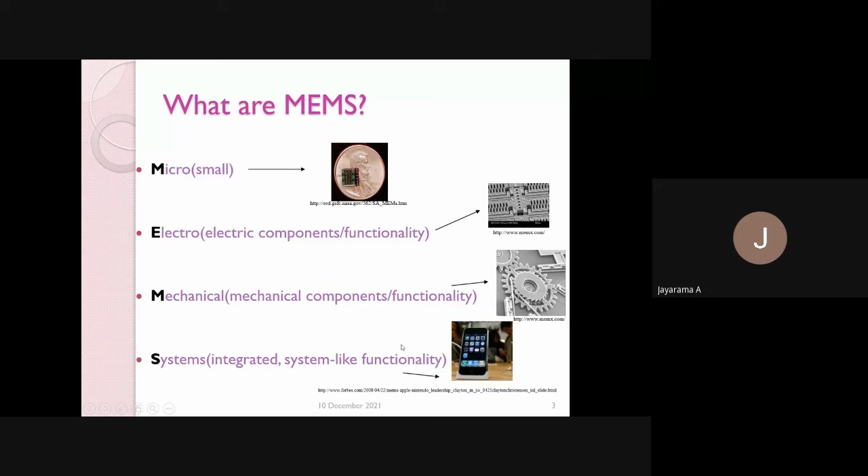So this is - micro means it is smaller in size. Electromechanical systems - system is an integrated system like a mobile phone. It's a system.

In brief, MEMS is a technique of combining electrical and mechanical components together on a chip to produce a system of miniature dimensions. It's the integration of millions of transistors on a single chip, which allows the microsystem to both sense and control the environment. The components are integrated on a single chip using microfabrication technique.

Where do you find MEMS? MEMS you can find in printers, high DPI inkjets. MEMS technology is used in the manufacture of inkjet print heads. This involves the formation of a tiny mechanical system on a substrate such as silicon or glass, which requires sophisticated micro-level microfabrication technology. For example, Konica Minolta has used this MEMS manufacturing technology for the high definition, high precision fabrication of nozzles and ink channels, which affect the characteristics of print head ejection.

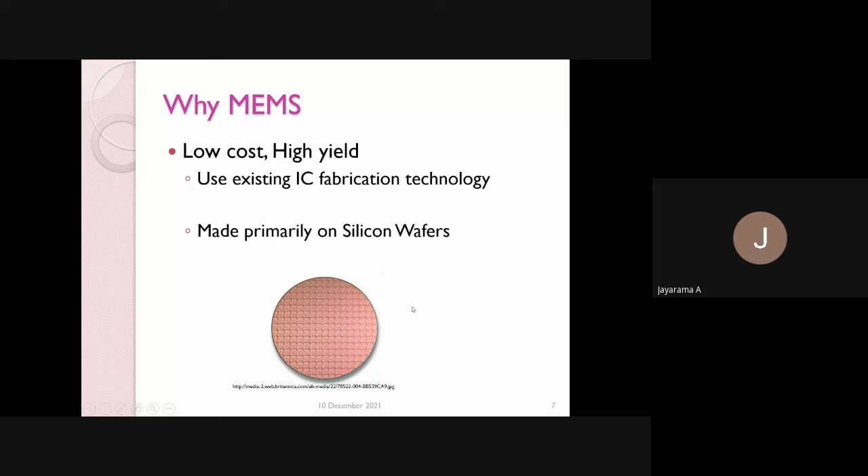MEMS flow sensors accurately detect minute airflow, as much as a single flap of a butterfly's wings. A gas flow sensor capable of measuring mass flow independent of temperature and pressure.

The well-known company which supplies this, you might be knowing, that is Omron. Omron BP measurement meters are well-known. MEMS air and gas flow sensors are highly resistant to dust, with a built-in dust segregation system. The sensor can be placed anywhere thanks to its dust resistant structure.

The favorable scaling for a lot of applications is another one, that is electrostatics. Electrostatics plays a prominent role in micro and nanomechanics, while other forces such as thermoelectric forces, piezoelectric forces, and even magnetic forces are used in micro and nanomechanical systems, that is MEMS and NEMS. Electrostatic forces are by far the most commonly employed.

Electrostatic forces are used to move mechanical components in electrostatic systems, and fluids in electrostatic fluidic systems.

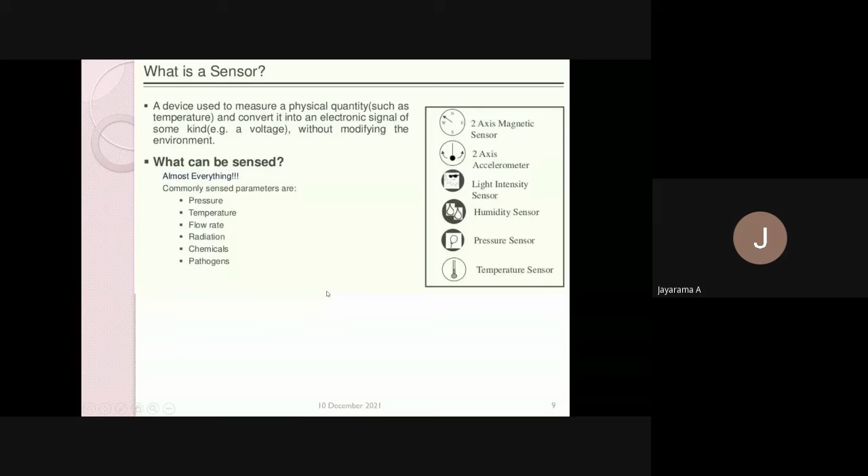MEMS have both advantages and disadvantages. The advantages: MEMS switches and actuators can attain very high frequencies. They are smaller in size. MEMS devices require very low power consumption.

MEMS can be readily integrated with microelectronics to achieve an embedded mechatronic system. It improved reproducibility, high accuracy, sensitivity, and selectivity, and is cheaper due to mass production. MEMS sensors possess extremely high sensitivity. Scaling effects at a microscopic level can be leveraged to achieve design and dynamic mechanisms otherwise not possible at macro scales. Also, it is easier to alter part of a device as compared to its macro counterparts.

Disadvantages also exist. One is that it is mainly expensive, very expensive during the research and R&D stage. Any new MEMS designs or devices cost a lot of money because in the R&D stage it requires more cost. Fabrication assembly unit costs can be very high in low quantities. Therefore, MEMS are not suitable for unique applications unless cost is not an issue.

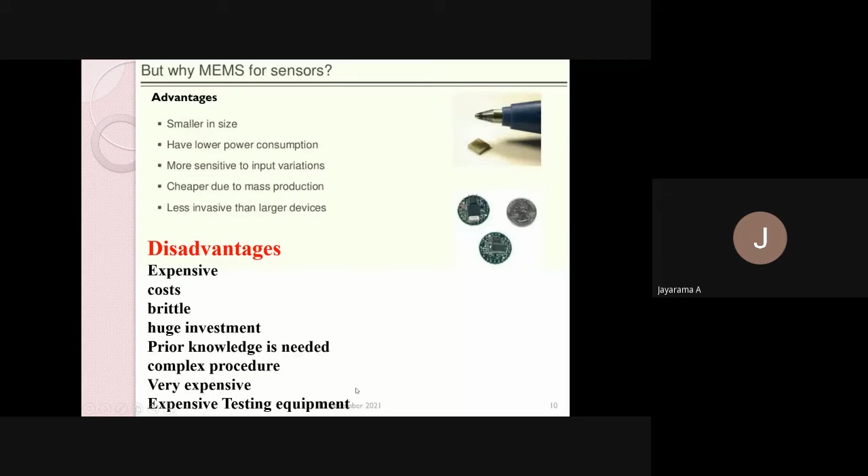Most of the MEMS devices are made of silicon. Polysilicon is a brittle material. Fab establishment requires huge investment. Prior knowledge is needed to integrate MEMS devices, and the design includes very complex procedures. There are also very expensive upfront setup costs for fabrication, clean rooms, and ancillary facilities, and the testing equipment to characterize the quality and performance can also be expensive.

These are all different types of sensors, mainly classified into four categories: mechanical sensors, optical sensors, thermal sensors, and chemical and biological sensors. In mechanical sensors, physical concepts or material properties are used, one being piezoresistivity and piezoelectricity. The types of mechanical sensors are strain gauges, accelerometers, pressure sensors, microphones, etc.

A strain gauge measures how structures, both man-made and biological, react to an applied strain. These devices are common in the mechanical and civil engineering fields for monitoring structural health of bridges, detecting soil pressure changes near oil drilling platforms, and testing aircraft components. Strain gauges can even be used to analyze bone structure in humans and animals.

In the fields of civil engineering and biomedical engineering, strain gauges are used to measure deformation sustained by various objects. Typically, foil gauges are used, but they have low sensitivity.

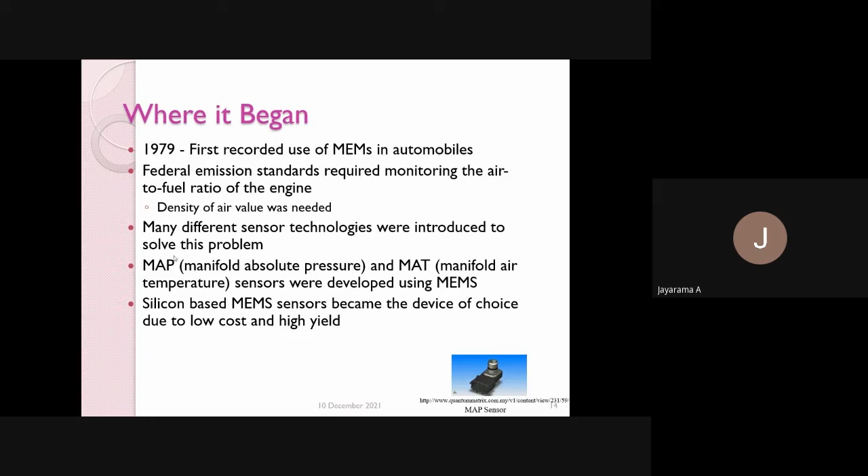By doing this, the catalytic converter efficiently minimizes tailpipe emissions, bringing them into compliance with federal regulations. Many different sensor technologies were introduced to solve this problem. MAP, manifold absolute pressure, and MAT, manifold air temperature sensors, were developed using MEMS. Silicon-based MEMS sensors became the device of choice due to low cost and high yield.

These are different types of current and future automotive sensors: oil quality sensors, coolant temperature sensor, vehicle speed sensor, steering rate sensor - a variety of sensors you can see. Also fuel level sensors and fuel tank pressure sensors. Some of these are in ordinary cars, while in expensive cars most of the sensors exist.

Who developed these? There are two groups. One is Delco Electronics Group, that is General Motors - they used piezoresistive sensing around the mid 70s. The other company is Ford, which developed two types of MAP sensors.

MAP means manifold absolute pressure. The Delco version had a sensor die similar to the Honeywell sensor die of the time, and was packaged in a housing similar to the Fairchild ignition module.

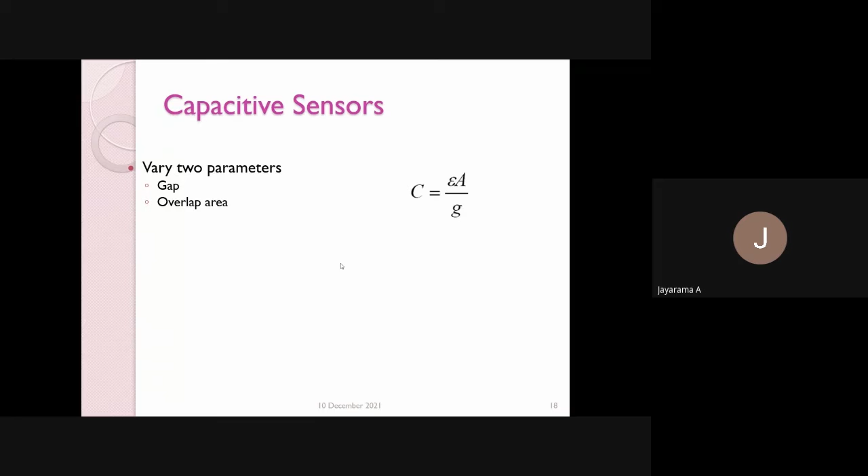In this parallel plate capacitor, A is area and G is the spacing, and epsilon is the permittivity of free space. It is a well-known value, in farads per meter: 8.854 times 10 to the power minus 12. These capacitive sensors act like a simple capacitor. A metal plate in the sensing face of the sensor is electrically connected to the internal oscillator circuit, and the target to be sensed acts as a second plate of the capacitor. So a parallel plate capacitor has two plates.

One plate is fixed, the other one is oscillating - that is the accelerometer, oscillating. So based on this, the capacitor sensor works.

The capacitive MEMS pressure sensors are one of the most widely used transducers of various MEMS pressure sensors, since they offer excellent noise performance and low power consumption. These are the advantages of a capacitive sensor - one is low power consumption.

It also has a disadvantage: the capacitance of a MEMS capacitor is usually very small, so stray capacitance and parasitic capacitance are relatively large. This is the main disadvantage - the effect of stray capacitance and parasitic capacitance, meaning unwanted capacitance, becomes relatively large. Therefore, special attention has to be paid to these effects in the design of sensing structure and circuitry.

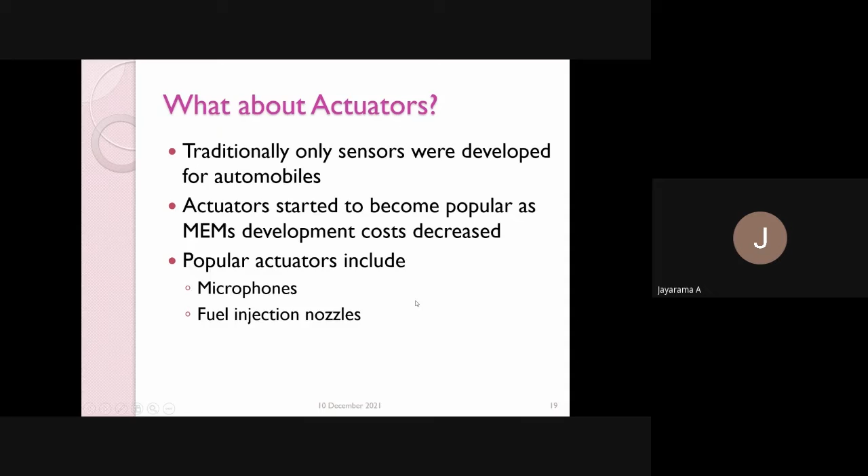This is about MEMS sensor fabrication - there are a few steps in the fabrication. These are important steps one must know. After undergoing MEMS FDP, one must know at least a few fabrication techniques.

The first step is wafer production. Usually silicon wafers are used in fabrication, so I'll brief about how we get a silicon wafer. The wafer is a round slice of semiconductor material such as silicon. Silicon is preferred due to its characteristics - it is more suitable for manufacturing ICs, integrated circuits, and it is the base or substrate for the entire chip.

First, purified polycrystalline silicon is created from sand. The sand is heated to produce a molten liquid - it has to be heated to a very high temperature because the melting point of sand is high. A small piece of solid silicon is dipped into the molten liquid, then slowly pulled from the melt. For the growth of silicon ingots, they use this melt technique, and the liquid cools to form a single crystal ingot.

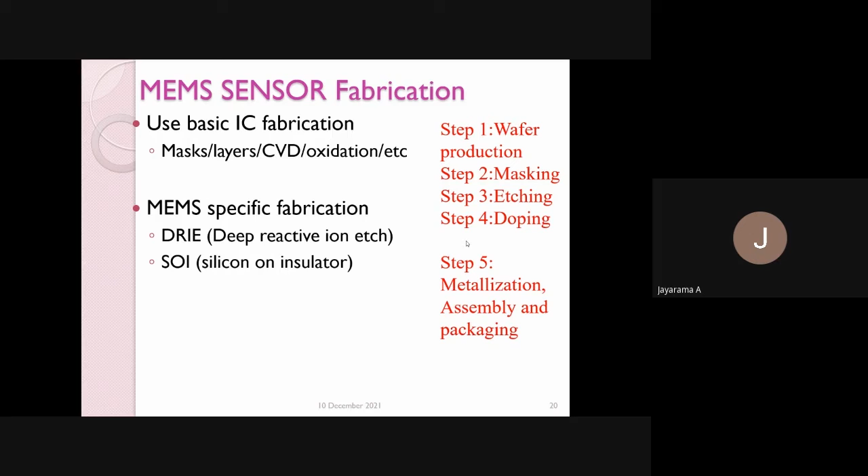There is a growth process called epitaxial growth, meaning the growing of a single silicon crystal upon the original silicon substrate. A uniform layer of silicon dioxide is formed on the surface - Si and SiO2 is a very good combination. Usually, when you slice silicon, SiO2 will automatically coat the surface for masking. This is one important step to protect some areas of the wafer while working on another area, a process called photolithography.

A photoresist film is applied on the wafer. The wafer is aligned to a mask using a photo aligner, the MJB mask aligner, a well-known aligner. Then it is exposed to ultraviolet light through the mask. One has to optimize the intensity, and before exposure, the wafer must be aligned with the mask. Generally, there are automatic tools for alignment purpose.

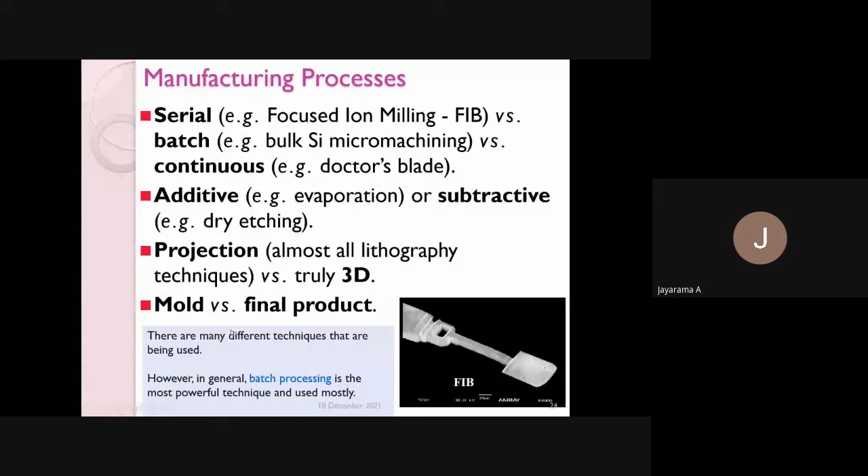In MEMS manufacturing technology, bulk micromachining has two categories: wet etching and dry etching. Surface micromachining involves deep micromachining and fusion bonding on the surface. The third manufacturing technique is high aspect ratio micromachining, LIGA.

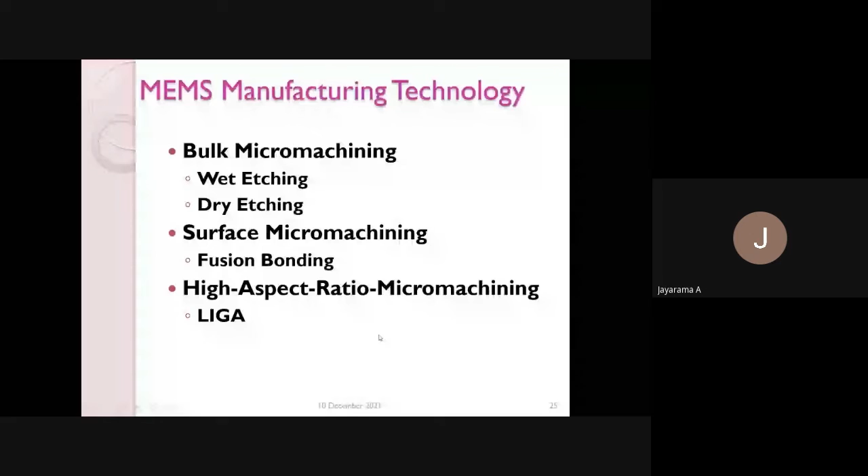LIGA is a German word. So in brief, bulk micromachining means this technique involves the selective removal of substrate material in order to realize miniaturized mechanical components.

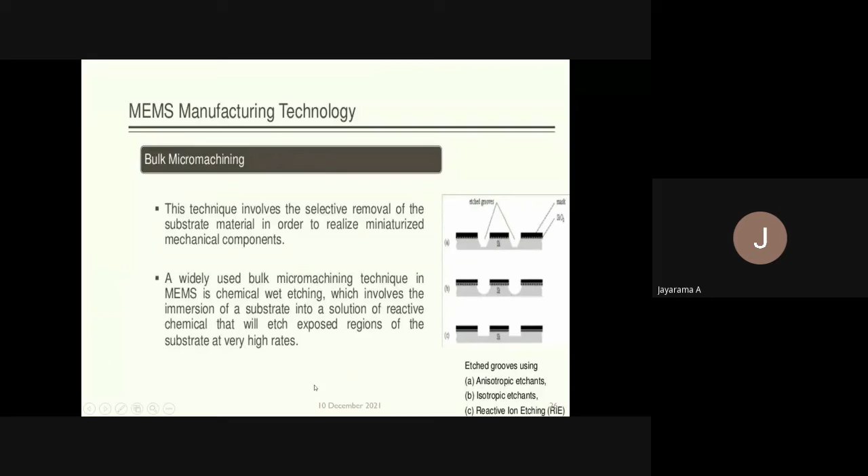A widely used bulk micromachining technique in MEMS is the chemical wet etching technique, which involves immersion of a substrate into a solution of a reactive chemical that will etch exposed regions of the substrate at very high rates.

Bulk micromachining means it is a process that produces structures inside the substrate by selective etching. Surface micromachining also has an etching process, but it creates structures on top of the substrate by film deposition and selective etching.

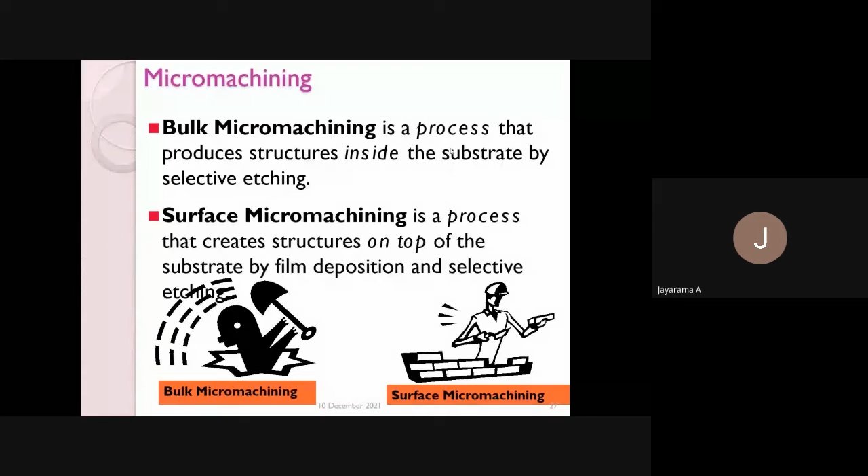I will show you the surface micromachining structures and bulk micromachining structures. I will spend some more time on the bulk micromachining fabrication technique. After that, we will explain our results, how we fabricated, and which steps we used for the fabrication of cantilevers—mainly beam cantilevers and cantilevers for the purpose of energy harvesting as well as for vibration sensors.

This is the classification of bulk silicon etching. Bulk micromachining is a process that produces structures inside the substrate by selective etching, using two techniques: wet etching and dry etching. In wet etching, isotropic etchants are different from anisotropic etchants.

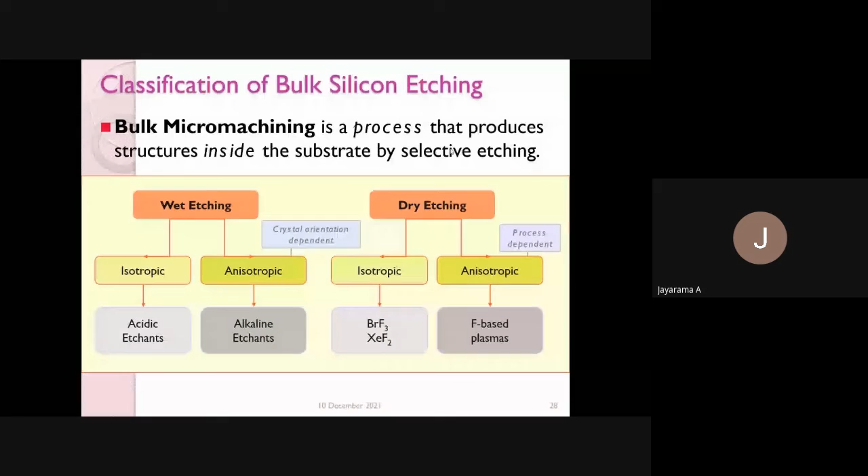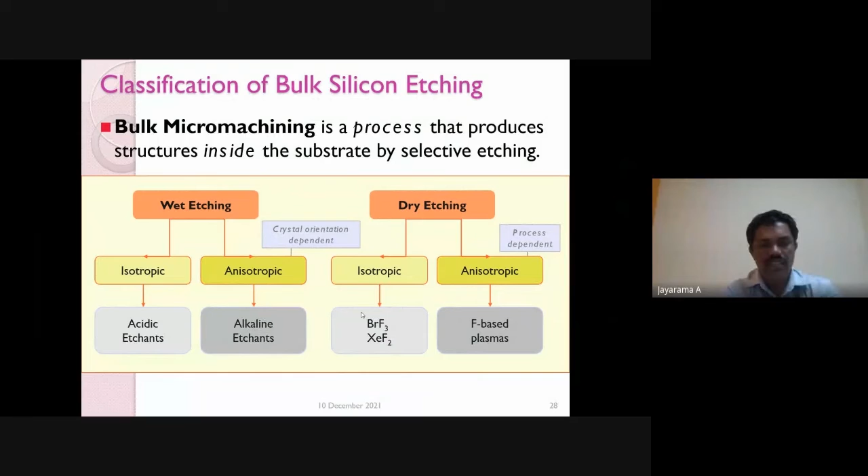In wet etching, isotropic etchants are acidic, while anisotropic etchants use alkaline chemicals. In dry etching, isotropic etching uses xenon fluoride and bromine fluoride, while fluorine-based plasmas are used in anisotropic dry etching techniques. It is process dependent.

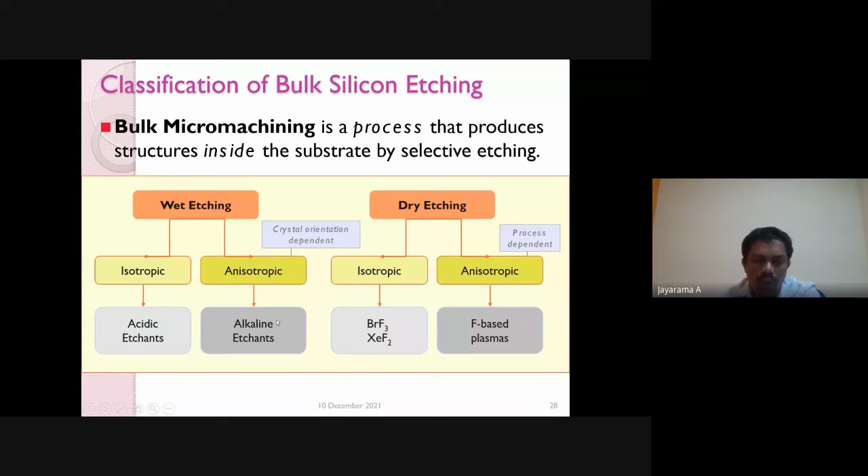We have to optimize—in wet etching also we need to optimize. These are the etching types of bulk micromachining, isotropic or anisotropic. I got this from a textbook.

Wet etching of substrates: usually silicon is the substrate, and this is the photoresist material. In between, it is etched—the protective resist, the black region, is a protective resist, and it's exposed to etchant. This black region is protected because it is coated with the photo protective resist, so this is the etched substrate.

In figure 9.2, the three principal planes in silicon crystals. One needs to understand—if you are fabricating any device, you must know the planes of silicon wafers. Silicon is a cubic crystal. There's the 100 plane, the 110 plane, and the third one is the 111 plane.

You can see the difference between isotropic etchant shapes and design dimensions, and anisotropic etching of silicon substrate. This is the 100 plane of silicon wafer, unetched wafer. This figure shows the selectivity ratio of etchants on silicon substrate and silicon dioxide—the anisotropic etchant used is KOH.

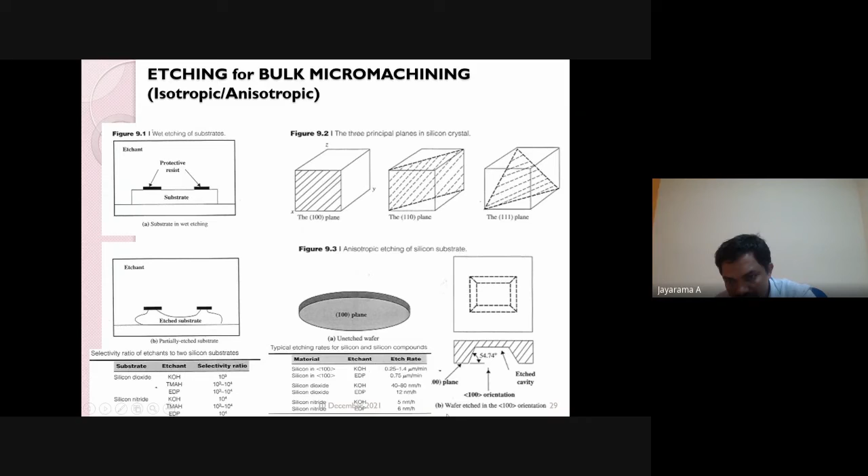The main information is about 100 orientation. Here in 100 orientation, when wafer is etched in 100, this angle is 54.74 degrees. You must know the planes of silicon wafers before etching, and the selection of etchant is very important to optimize the etch rate.

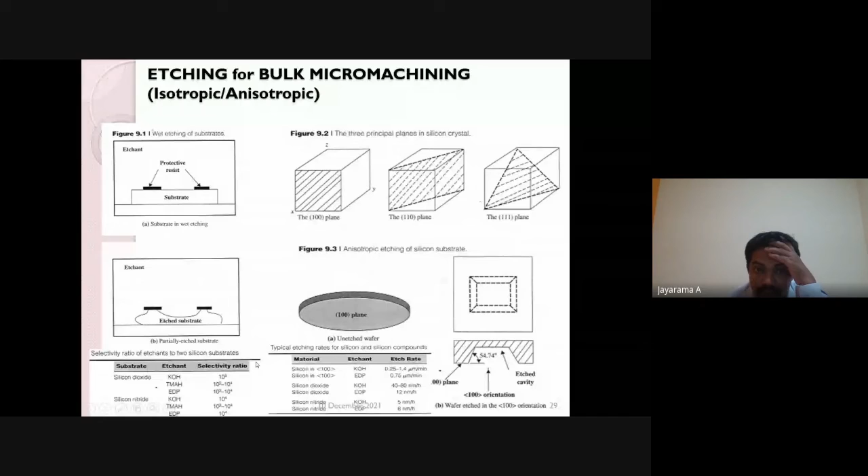Etching features include etch rate, that is the rate of removal of a material or film, and it varies with concentration, agitation, and temperature of etchant, porosity, and density of etched films. The selectivity is the relative etch rate of mask, film, and substrate. Etch selectivity is another parameter, and etch geometry is another parameter, most important while fabricating the device.

See the diagram, the pink region U, that is the mask undercut. Capital R means etching depth. You can make out the symbol S, which means slope of lateral walls, and B is bow of floor. These are the parameters usually considered while fabricating devices through etching.

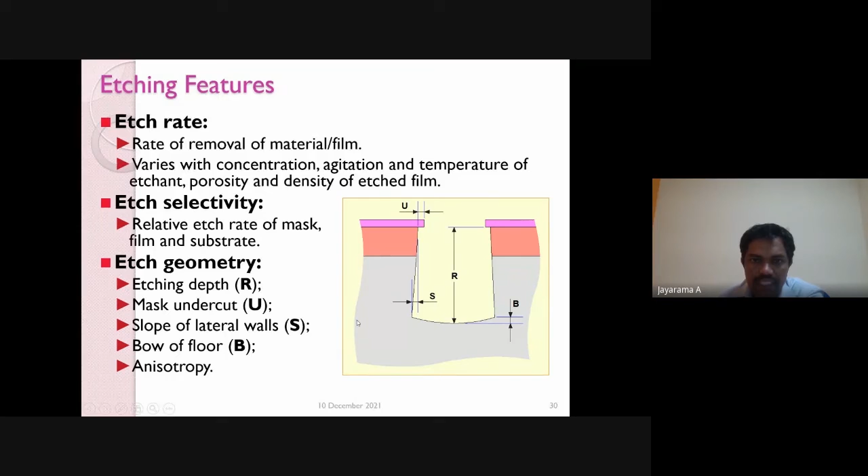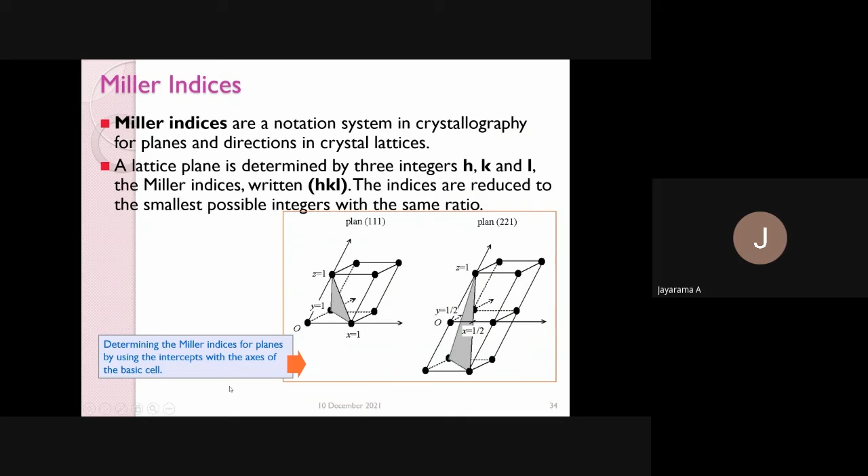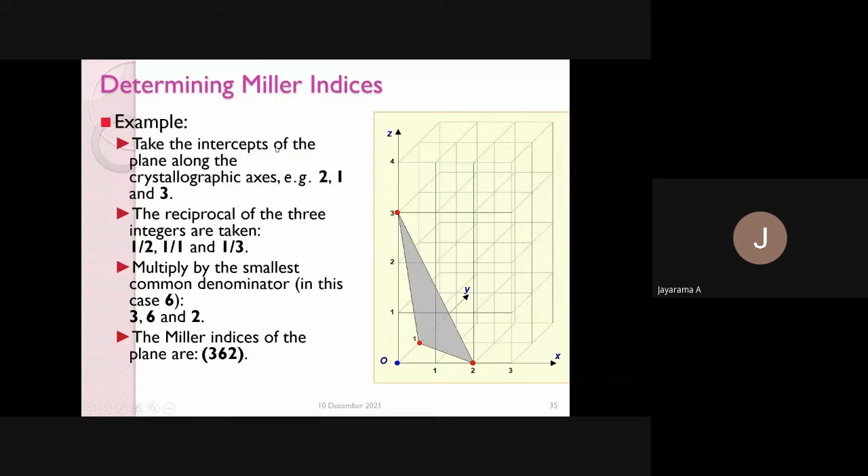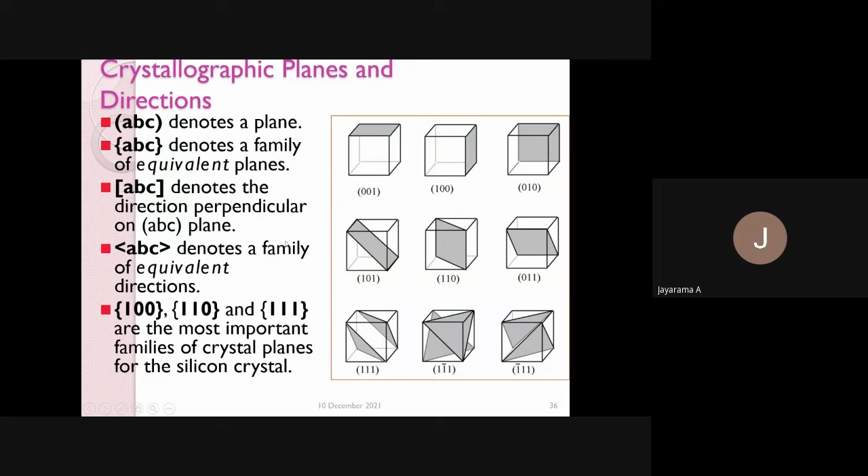And this is determining Miller indices. There is a specific procedure for determination of a plane using Miller indices. These are all the basics. These are the crystallographic planes and directions, you can see the shaded regions. This is 001 plane and 100 plane, and these are 1-bar-1 planes, different planes. This you might have studied in graduation courses. This is single crystal silicon wafer.

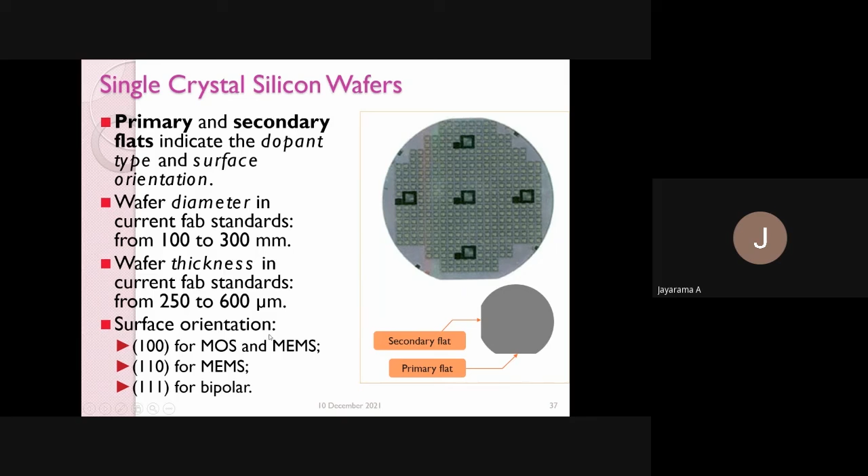Standard 100 mm wafers, the position—these are different wafers. This is primary flat in P-type 111 silicon wafer. This is N-type 111 wafer. Here you can observe the secondary flat. In P100, secondary flat is there, and N100. So these are the secondary flats and primary flat.

The primary flat on 100 and 110 wafers is along the 110 direction. Orientation of flats, orientation of flats for 100 mm wafers.

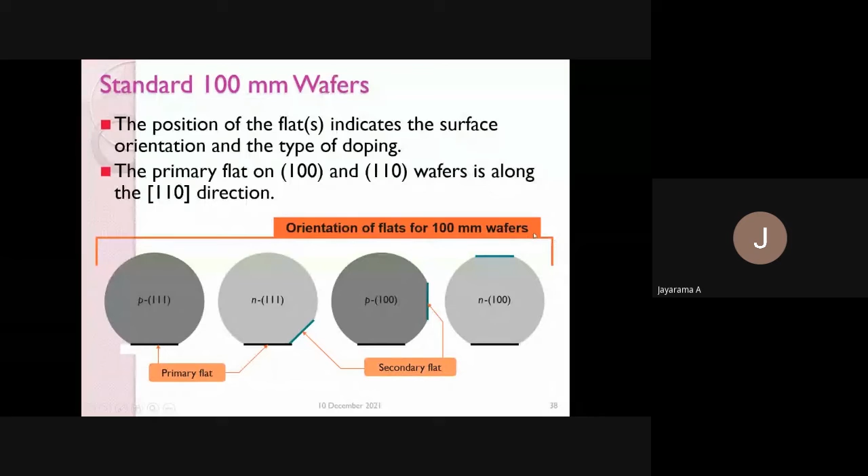Wafers used in multi-MEMS are P-type, around 150 millimeter. They use P-type 150 millimeter silicon wafers.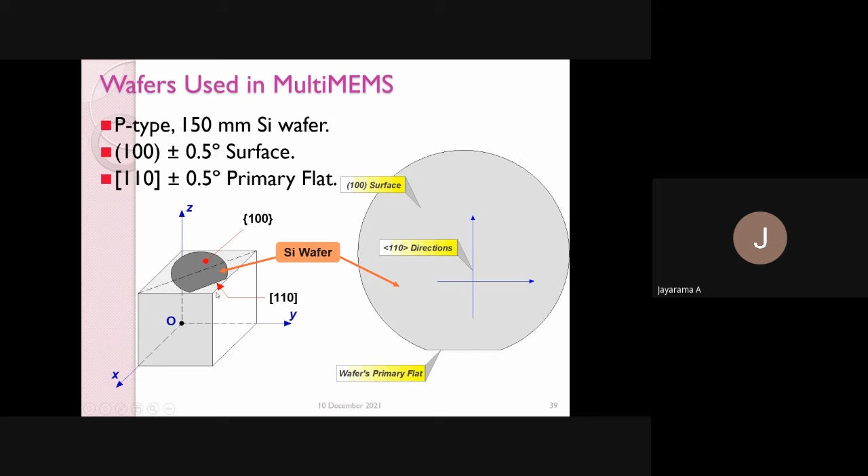This is the P-type 150 silicon wafer. You can make out the direction, which are the directions. You have to draw a schematic cubic, and you can make out this direction. This is 110 direction, then this is 100 direction.

In isotropic wet etching of silicon, see the first diagram. This is with stirring. Both are isotropic, with stirring and without stirring. You can see the difference. Isotropic wet etching of silicon: all crystallographic directions are etched at the same rate.

Etchants are usually acids, and the etching temperature is generally 20 degrees Celsius to 50 degrees Celsius. As the temperature increases, etching rate also increases—that is the general concept. The reaction is diffusion limited, and there is a very high etch rate, up to 50 micrometers per minute.

That is the etch rate in isotropic wet etching of silicon, and there will be significant mask undercutting—undercutting, you might have observed. This is undercutting. Masking is very difficult. Gold, chrome-gold—as I told, chrome is used for adhesion. Gold is used for contact.

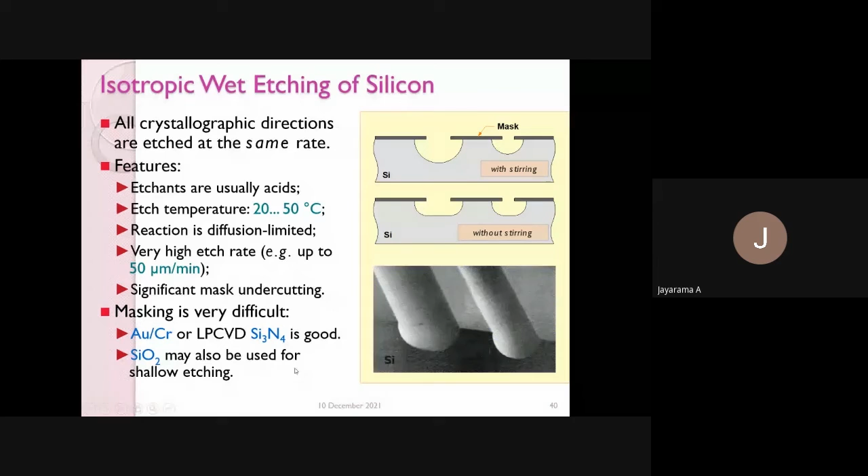Or low pressure chemical vapor deposition—silicon nitride is good. Silicon oxide may also be used for shallow etching. This is about masking.

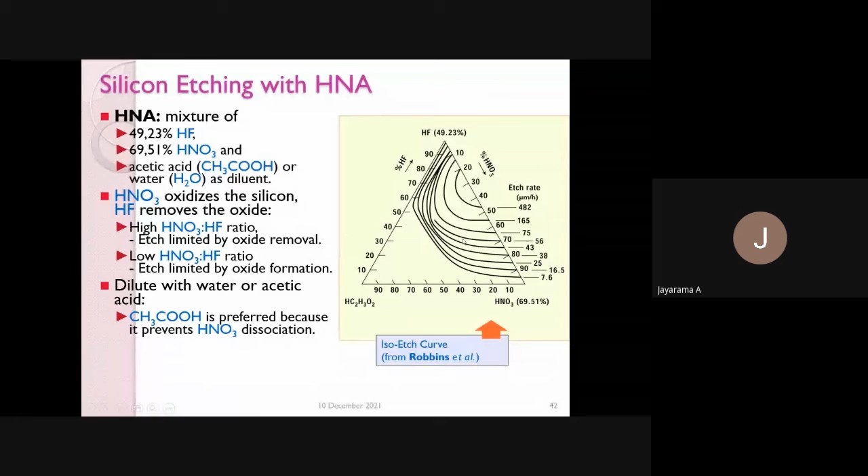This is about isotropic etching of glass. Single or double side etching of glass wafers is achieved either by using hydrofluoric acid water solution or a combination of hydrofluoric acid, nitric acid, and acetic acid, HNA. Typical etch rate of borosilicate glass in HNA is 1.9 micrometer per minute. Applications are etching cavities and through holes.

Anisotropic wet etching of silicon. Look at this diagram: the angle in the 111 plane is anisotropic at 54.74 degrees, and you use this technique while fabricating beams and cantilevers, as in our experiment under INUP. One of the students, as I told in the beginning, Rashmi, worked in the INUP project and realized the cantilevers and beams.

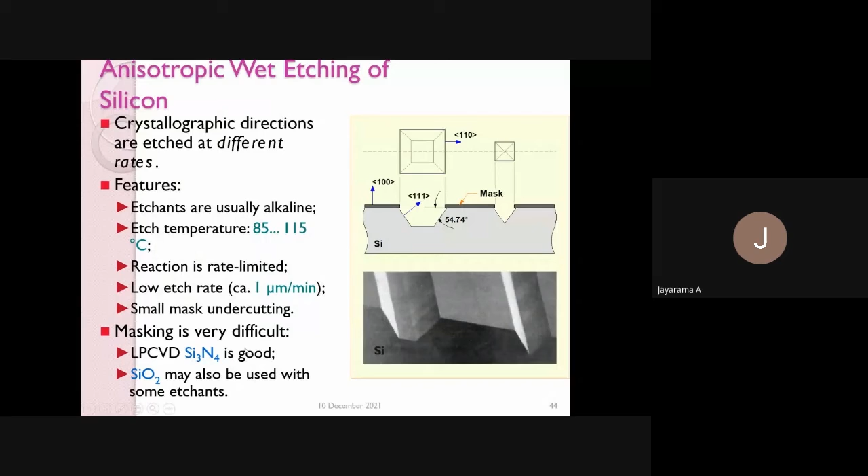In anisotropic wet etching, crystallographic directions are etched at different rates. The etchants are usually alkaline etchants. Etch temperature is 85 to 115 degrees Celsius, whereas before it was up to around 50 degrees Celsius. Here it is high temperature because it's anisotropic wet etching, and the reaction is rate limited. Low etch rate means about 1 micrometer per minute, with small mask undercutting, so masking is very difficult. This is about the anisotropic wet etching method.

Etching setup: this is the setup they use. This is the condenser, and nitrogen gas is passed here, and this is the heating wire, and the holder looks like this. This is the silicon wafer holder, where wafers are mounted vertically. This thermometer is used to measure temperature. This is the laboratory setup for wet chemical etching of silicon, and the principles for industrial manufacturing equipment are also the same.

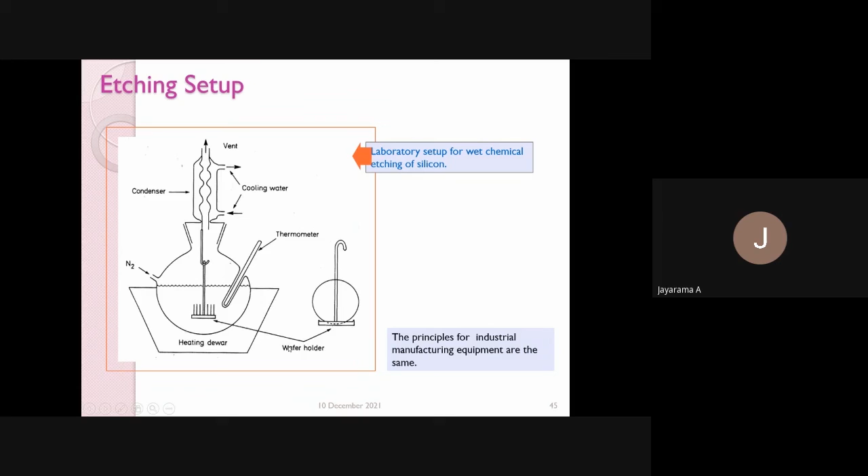As explained in the previous table, this is about anisotropic etching of silicon. Here the etchants are ethylene diamine, pyrocatechol, and water, with compositions of 750 ml, 120 gram, and 100 ml. Using this composition, the etch rate ratio for the 100 plane is 35, and for the 111 plane is 1, so the ratio for 100 by 111 is 35 is to 1. The etch rate is 0.75 micrometer per minute.

Masking film is this one, these are the masking films. Another combination is 750, 120, 240 at 115 degrees Celsius, giving an etch rate of 1.25 micrometer per minute. So the etch rate and etch ratio purely depend upon the composition of the etchants and diluents.

This is TMAH. This etchant etches smoothly, the surface etched by TMAH is always smooth. If you want smooth surfaces, for example for the fabrication of transistors like MOSFET, metal oxide semiconductor field effect transistors, you need a smooth surface, so you use TMAH as the etchant. For the fabrication of sensors like gas sensors, you need a rough surface, so you use KOH as the etchant.

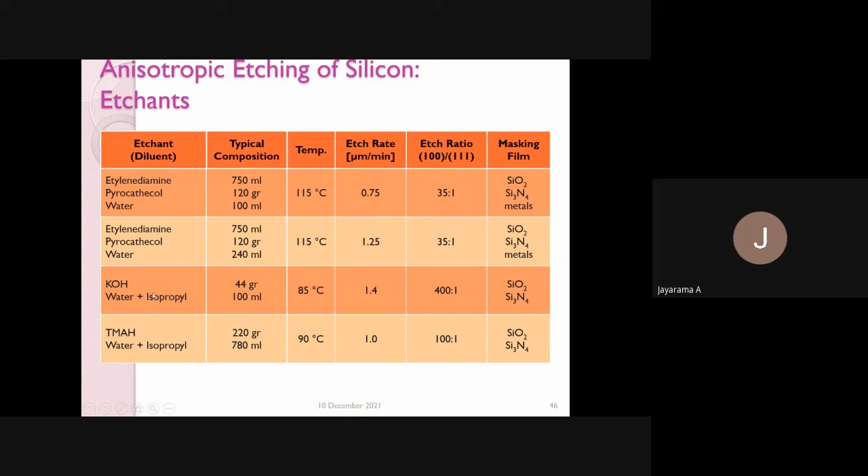Chemistry of anisotropic etching has phases: transport of reactants to the silicon substrate surface, surface reaction, and transport of reaction products away from the surface. These are the etching phases. For that, a stirrer is required, continuously stirring.

Key etch ingredients are: oxidizers, oxide etchants, diluents, and transport media. The oxide etchants depend upon the composition of HF, HNO3, and acetic acid. So this is the overall chemistry of anisotropic etching.

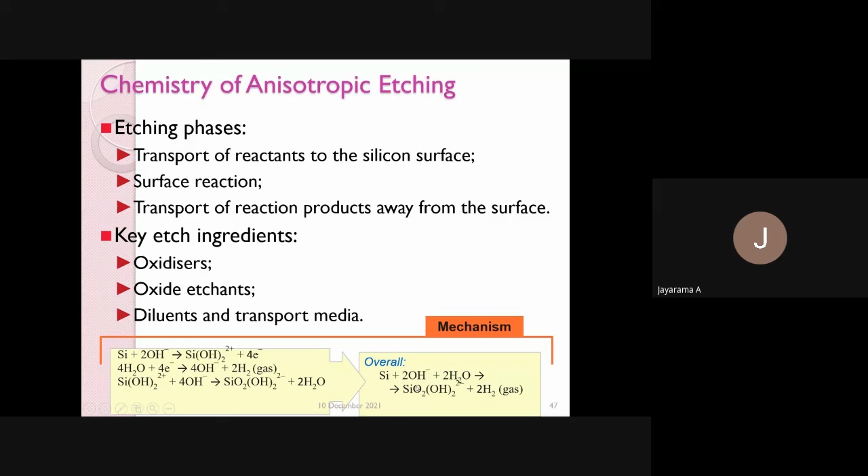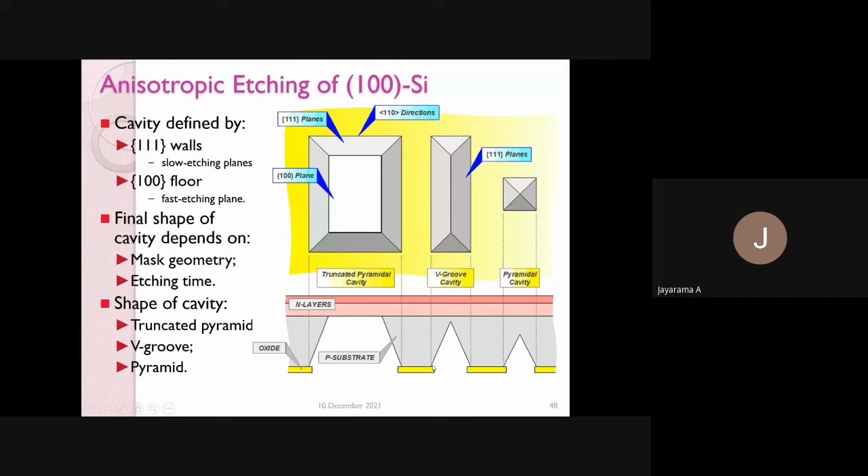Cavity geometry for 100 silicon. This is the 111 plane, and this is 100. The relation is used to calculate the exact amount of depth, WB, and W naught. You can adjust this so that, using this formula, the angle is 54.7 degrees, which is standard for silicon anisotropic etched cavities in 100 silicon. The square masking film opening is oriented parallel to the 110 direction. This is the standard formula one has to use to etch silicon in a particular shape.

WB is equal to... this is called a trapezoidal shape. We have done this type of trapezoidal shape for fuel flow. I think my colleague Professor Richard Pinto might have explained about hydrogen fuel cells or direct methanol fuel cells.

There we etched in a trapezoidal shape because the flow rate was maximum in that shape. This shape was designed based on the formula WB equals W naught minus 2L, where WB is this width, W naught is this other width, and L is the depth into cot 54.7.

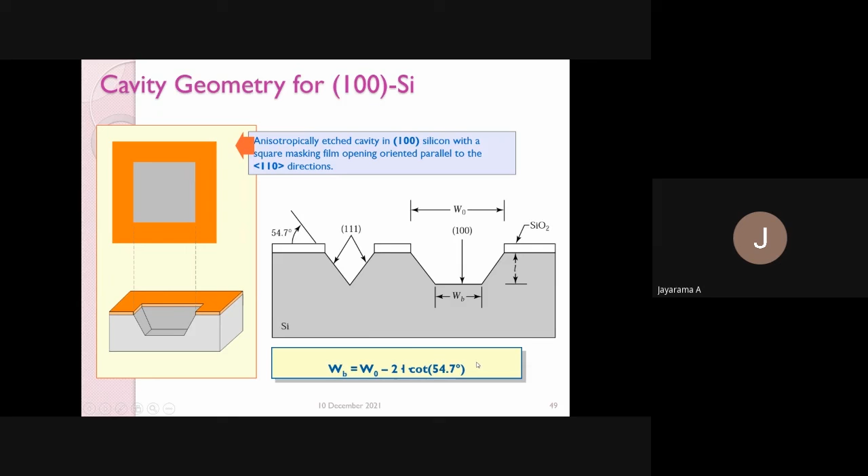This is about mask undercutting. See diagram A: it is a pyramidal pit bounded by 111 planes. This is the 100 direction, here is the 111 plane, and this is the 100 plane.

See diagram B: it's a type of pit expected from slow undercutting of convex corners. It all depends on the type of device you want to fabricate. Diagram C shows a type of pit expected from fast undercutting of convex corners.

In D, this convex shape is somewhat trapezoidal. Further etching of C produces a cantilever beam. A beam means it is supported by two ends in the vertical direction, supported by two ends.

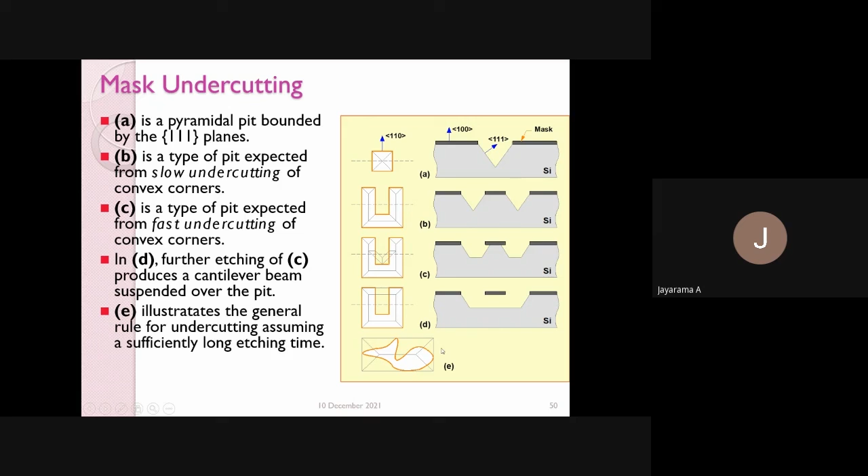And E illustrates the general rule for undercutting, assuming sufficiently long etching time. This is about mask undercutting and anisotropic etching of 110 silicon. Here the cavity is defined by 111 walls, with 110 being the fast etching planes. As I explained, the 111 to 100 etch rate ratio is maximum here.

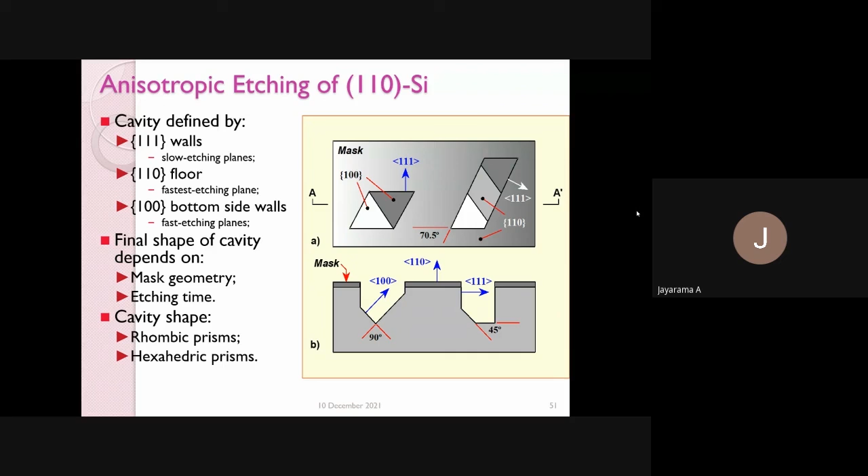So this is the mask. If you use a different mask, you can get different shapes. The final shape of the cavity depends on mask geometry and etching time; cavity shapes may be rhombic prisms or hexahedric prisms.

Methods of selective etching depend on the time of etching methods. It is necessary to calculate the needed etching time based on the etching rate, using chemical selective etching techniques. Here the etching stops when a chemically resistive layer is reached. This is an electrochemical selective technique.

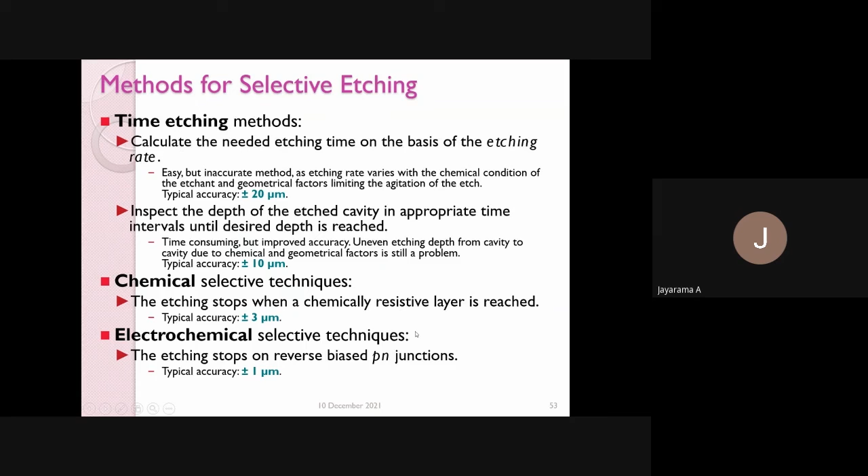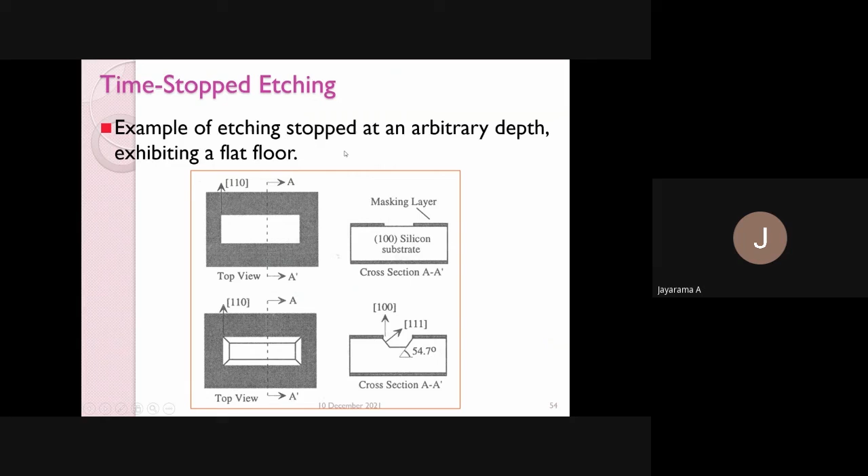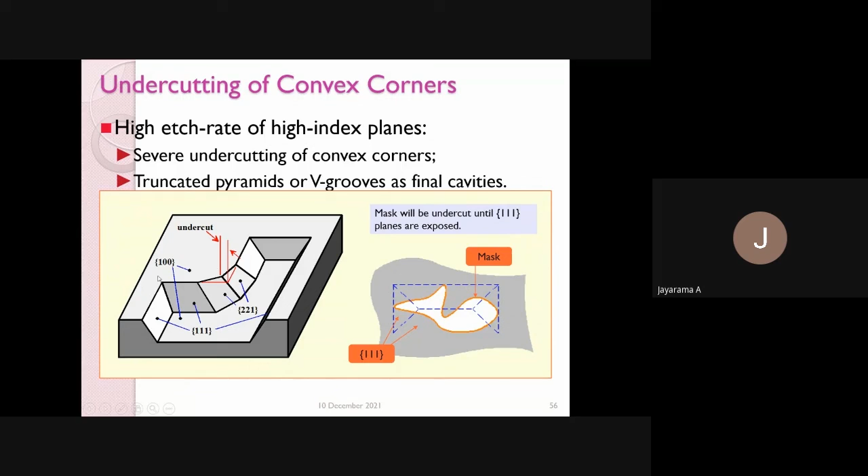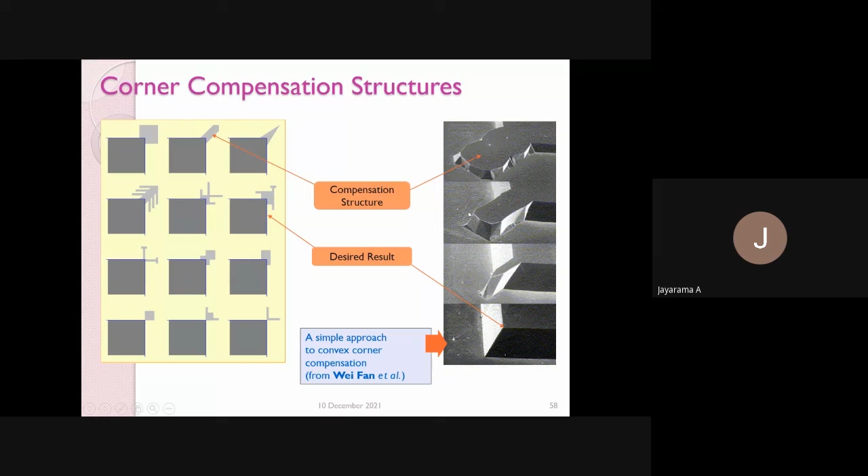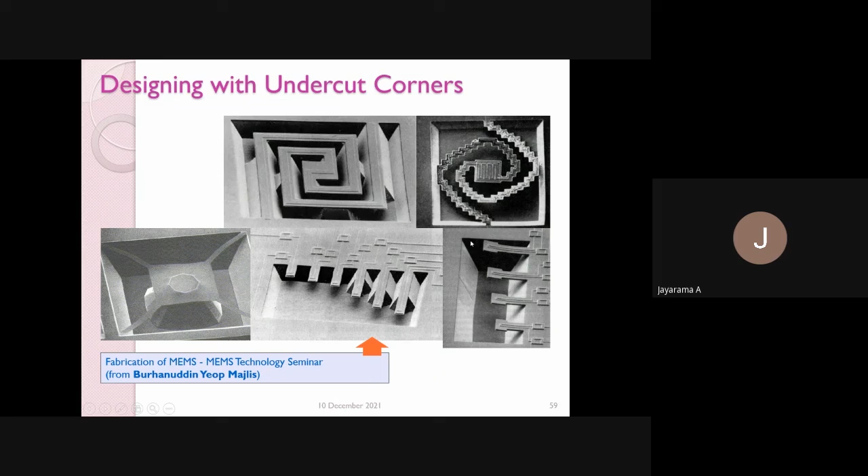These are different designs with undercut corners, from a MEMS technology seminar. Designing with undercut corners, you can make different shapes. This is a cantilever structure.

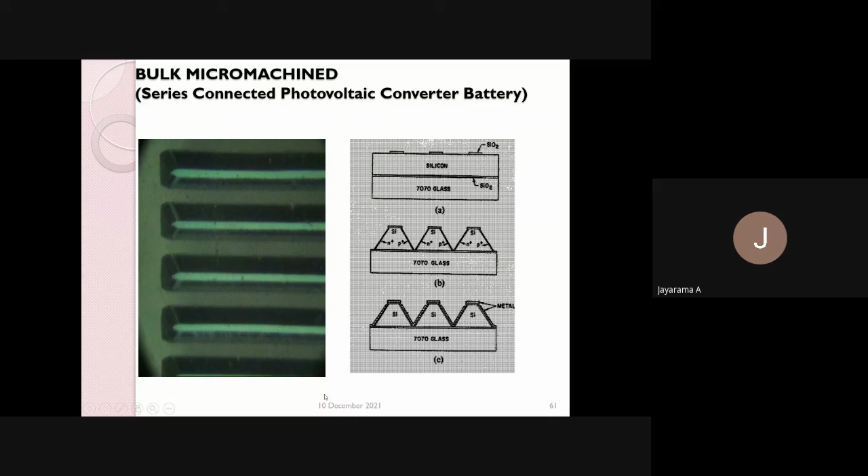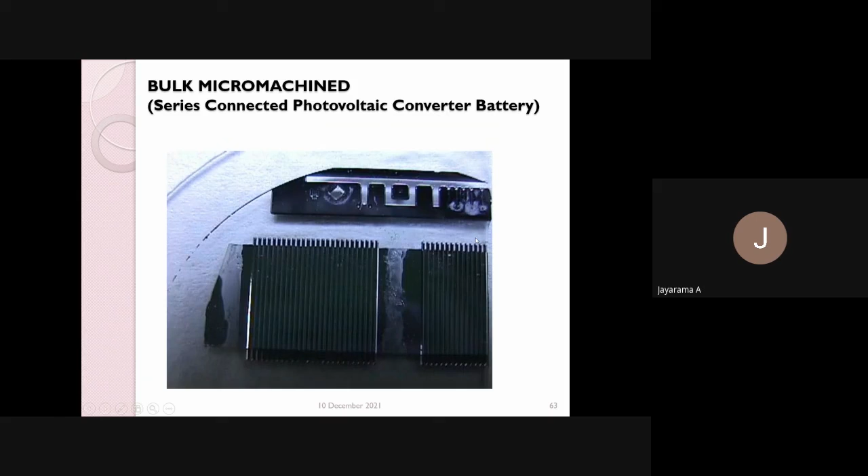The sacrificial layer can be polyvinyl alcohol or a photoresist. That may be the sacrificial layer. It is exposed, and that part is removed by etching, then it is coated again by polysilicon, forming the polysilicon structure. This is etched further and developed so that the lower coating, the sacrificial layer, is removed.

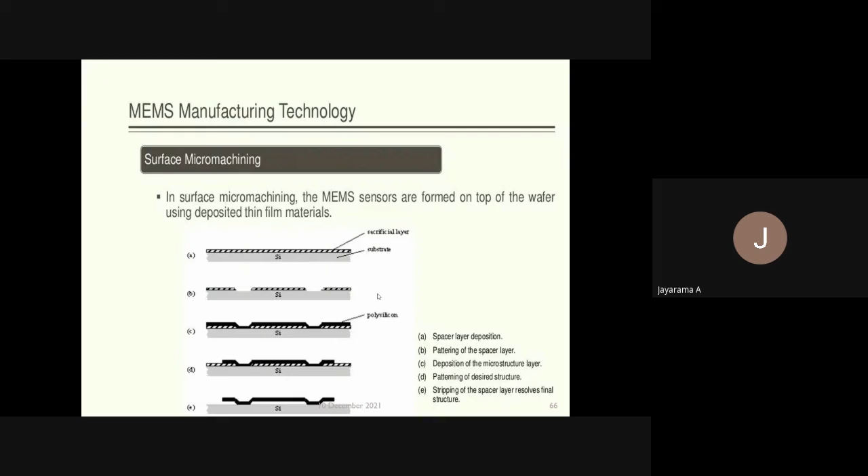This is done by patterning of the desired structure. E is the stripping of the spacer layer, giving the final structure. So A is spacer layer deposition, B is patterning of the spacer layer, C is deposition of the microstructure layer, D is patterning of the desired structure, and stripping of the spacer layer results in the final structure. This is about silicon micromachining with high aspect ratio.

These are some of the military operations that also use this technology. Applications in marine military operations include detonating the torpedo at the right time, hitting the target in a crowded environment, and preventing any premature explosion. This MEMS technology is used in defense also.

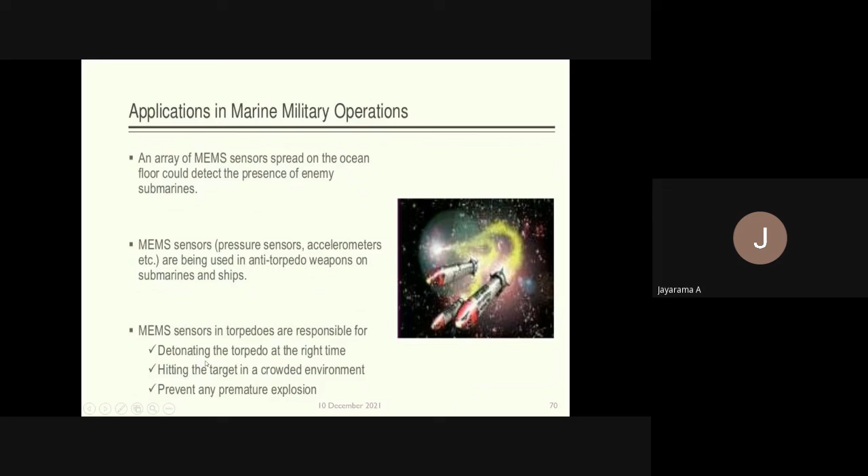Now this is about our work. I will briefly explain this since the time is short. Our work is mainly on energy harvesters and vibration sensors in both applications. The fabrication technique is the same, but the applications are different: one is used for energy harvesting, the other one is for sensing.

We fabricated both beam and cantilever structures using a piezoelectric material, PVDF-TRFE, which is polyvinylidene fluoride trifluoroethylene. This is one of the expensive materials; each 100-gram sample costs around 1 lakh rupees.

Initially, a brief about energy harvesters: available alternative energy sources, common energy harvesting systems, challenges from different sources of energy, and energy storage. Finally, I will explain our results.

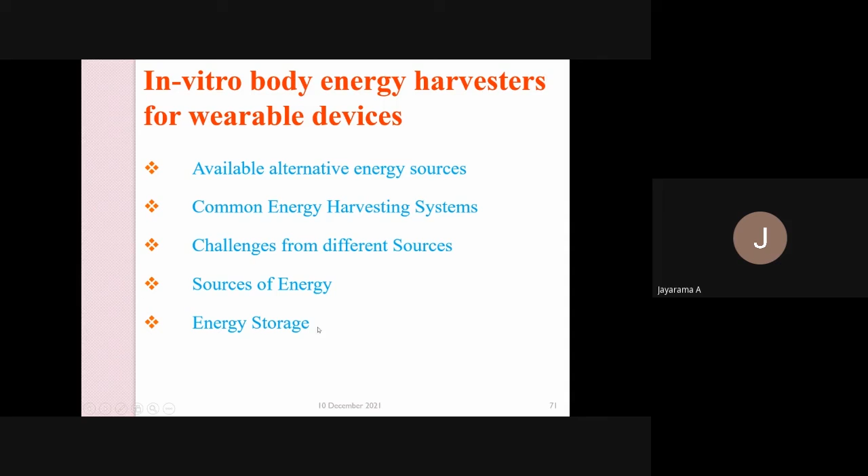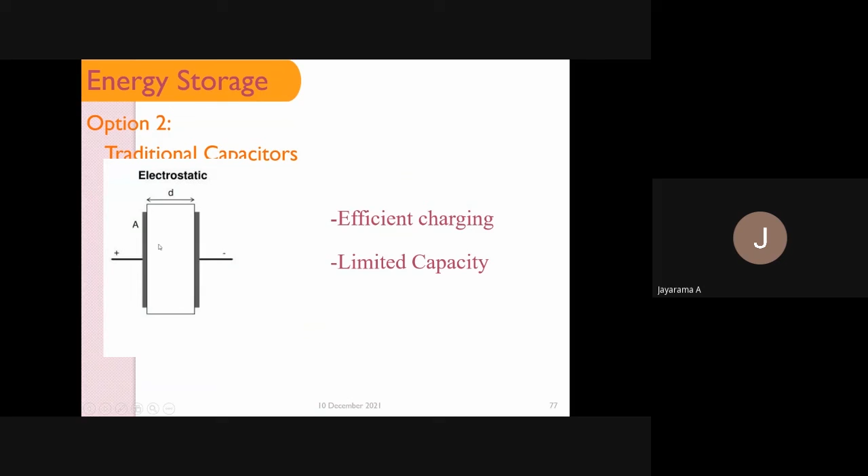For energy storage, these are traditional rechargeable batteries. Then this is another energy storage system, this is a capacitor, and this is a supercapacitor.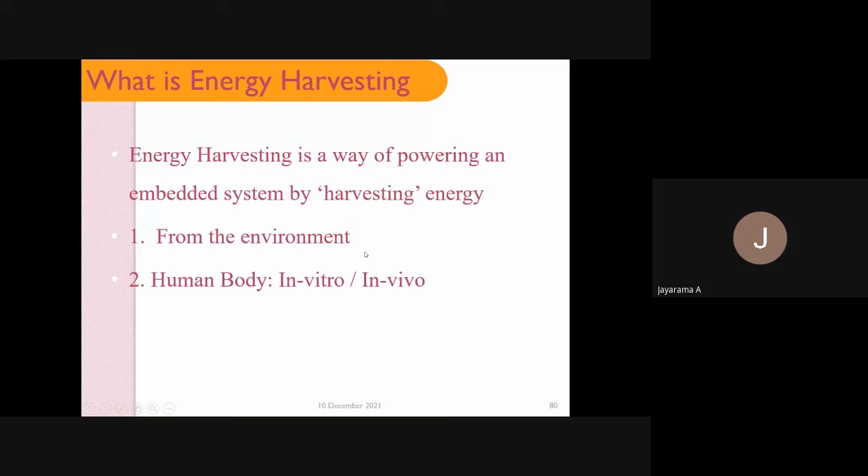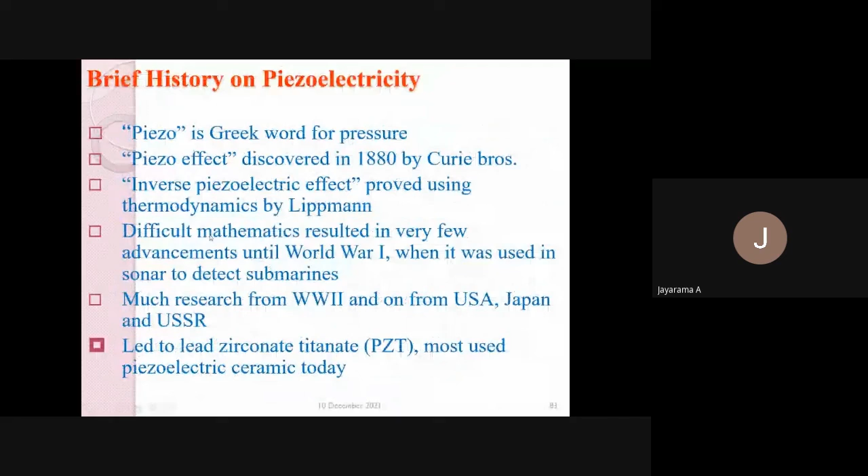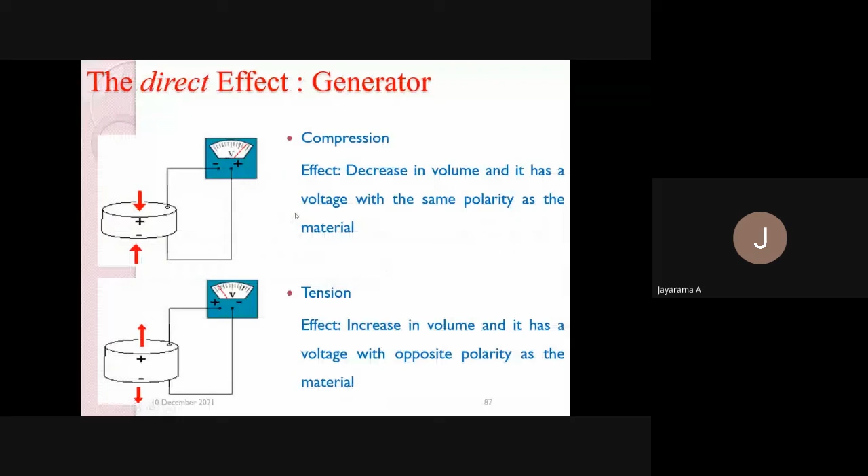So look here, this is about piezo and the piezoelectric effect. This piezoelectric effect means when you apply pressure, it generates voltage, and these are all the basics. This is about the inverse piezoelectric effect: when you apply voltage, it vibrates. This is the basic mechanism of the piezoelectric effect, and this is the origin of the piezoelectric effect.

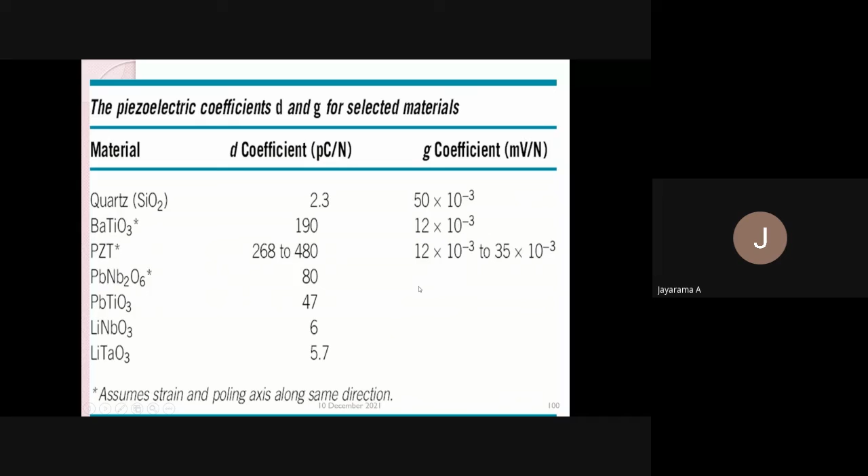So our aim was to extract energy from the body. The body vibrates in the frequency range of 50 to 100 hertz. In the case of a Parkinson's patient, body vibration may be around 1 to 20 hertz. Otherwise, a normal person's body vibrates at 50 to 100 hertz. With that we can't make out, and we need to extract energy from the body through the principle of resonance.

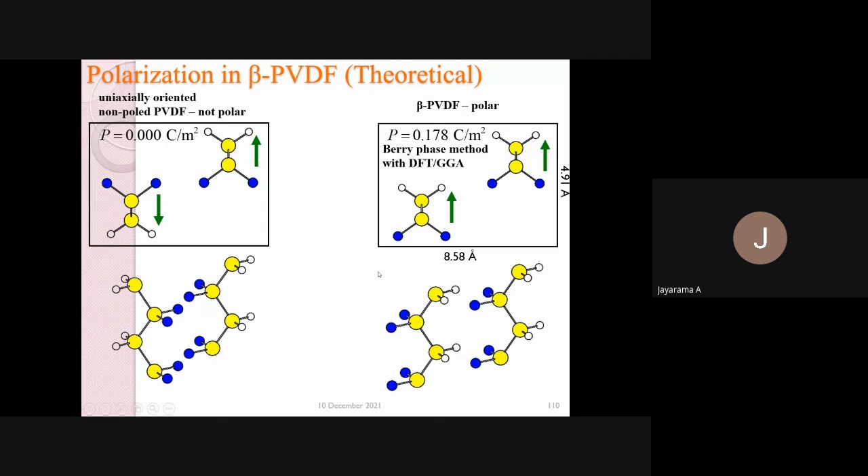So these are all about our polymer, the beta phase PVDF. We used the native piezoelectric material PVDF-TRFE. PVDF itself is a cheaper material, while PVDF-TRFE is the expensive one. We purchased PVDF-TRFE because converting PVDF into a piezoelectric material requires poling and other processes, so we procured a material that readily exhibits piezoelectric properties - that is PVDF-TRFE. These are all about this structure.

So initially we designed the mask. Our aim was to extract and generate power by using body frequency, and we tried to make 200 micrometer cantilevers and 300 micrometer cantilevers.

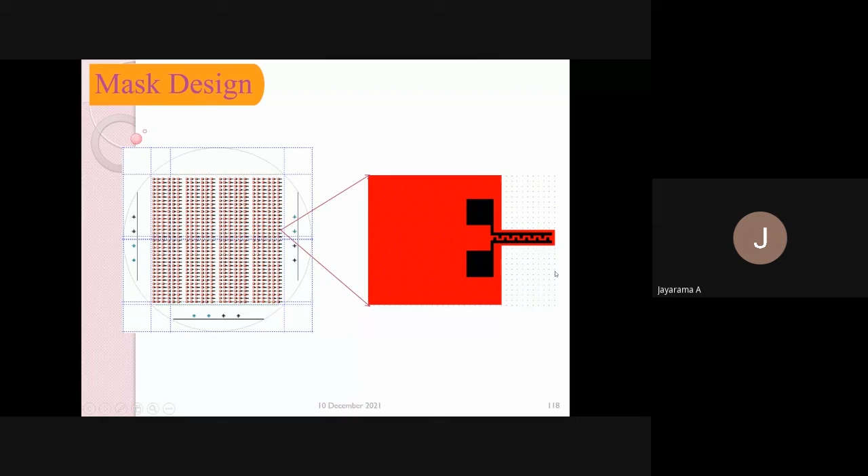This is the mask design, and this is the fabrication of the device: silicon wafer, cleaning process, and so on. These are the fabrication techniques and steps, and finally we get a beam or a cantilever. So this is the vibrational energy harvesting system.

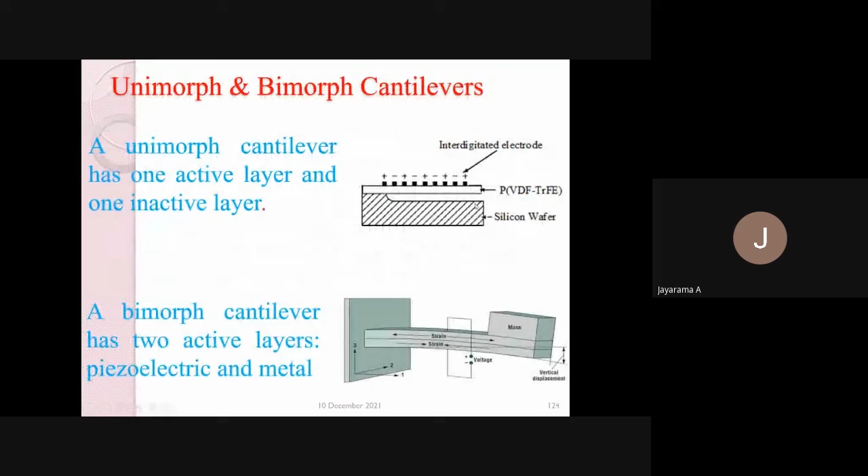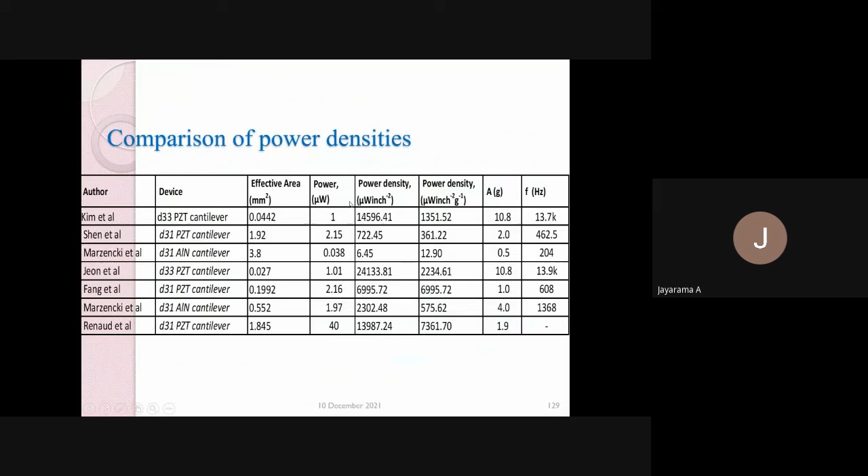This is about unimorph and bimorph. These are different power comparisons. This is piezoelectricity - applying pressure generates voltage.

Now come to our results. This is the design of our cantilever, made using some software, and this is the simulated result. Simulation was done using COMSOL Multiphysics, and this is the voltage generated. Here the resonant frequency is around 590-600 hertz. Our aim was to develop a low frequency energy harvester or vibration sensor.

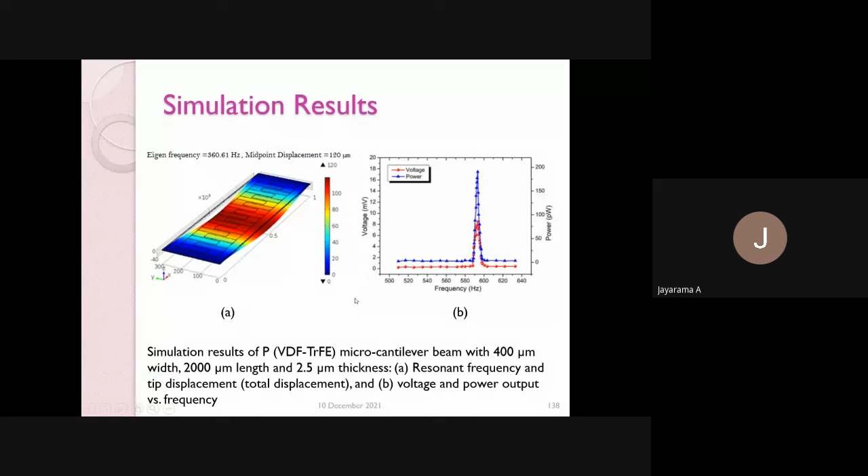These are the process fabrication steps for the piezoelectric vibration sensors, and these are the results. So this is the ultimate structure. When you observe through FESEM you get this image, and this is the side view FESEM image of PVDF-TrFE micro cantilever with dimensions 2000 micrometer length and 400 micrometer width.

This is the variation of midpoint displacement as a function of frequency. We checked this using a laser Doppler vibrometer. The resonant frequency we checked using the laser Doppler vibrometer.

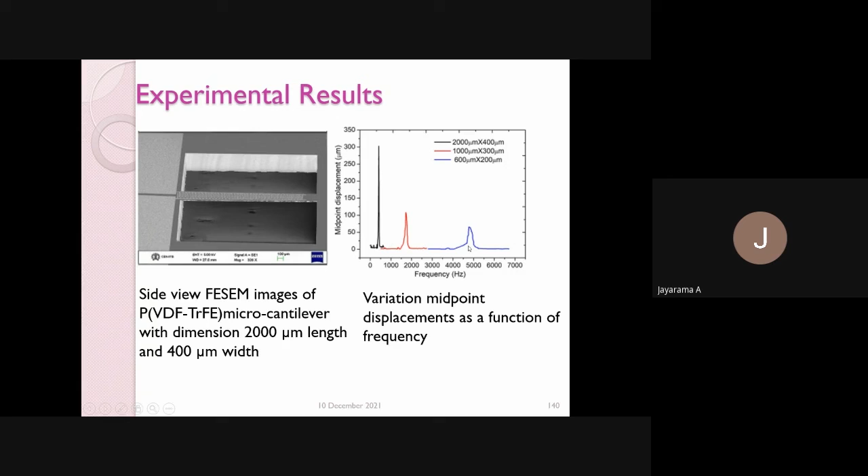This is the fabrication of micro cantilevers and beams. The first one is cantilever, and this yellow region is the chrome-gold pattern. This is the simulation result for a cantilever based vibration sensor. This is cantilever beam based, with 300 micron width.

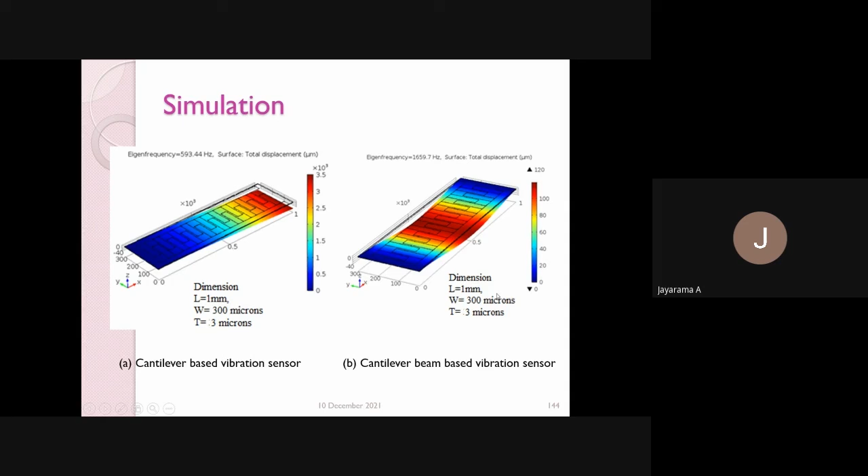These are the dimensions of the beam, and these are the processes as I explained. The result shows the displacement at the resonant frequency. We fabricated this for a different resonant frequency - you can fix the dimension for a particular resonant frequency. Here the resonant frequency is around 1600.

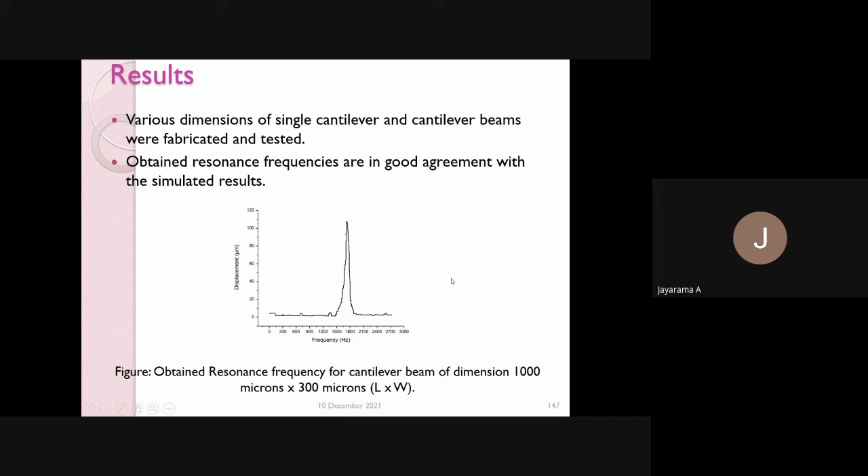We fabricated this mainly for one particular application. These vibration sensors are used for health monitoring of bridges, machines, etc. These results we have published in the journal Smart Materials and Structures.

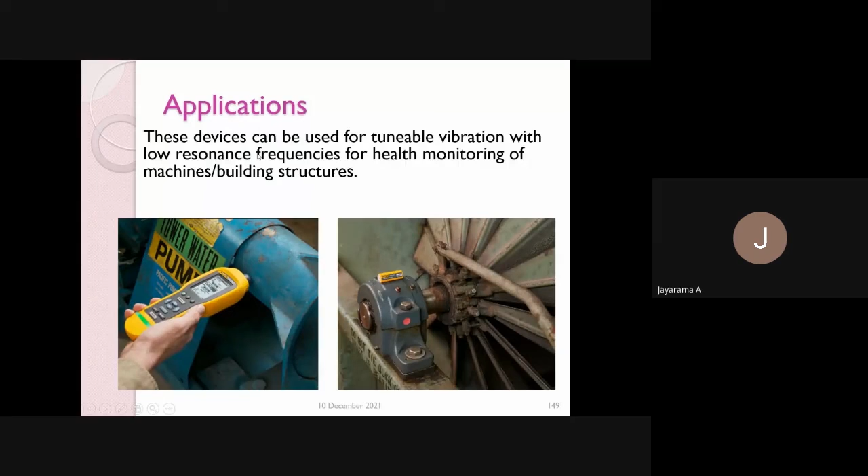And these are some applications of vibration sensors. The conclusion is: MEMS promises to be an effective technique of producing high quality sensors at lower cost. We can conclude that MEMS can create a proactive computing world - connected computing nodes that automatically acquire and act on real-time data about a physical environment, helping to improve lives, promoting a better understanding of the world, and enabling people to become more productive. Thank you.